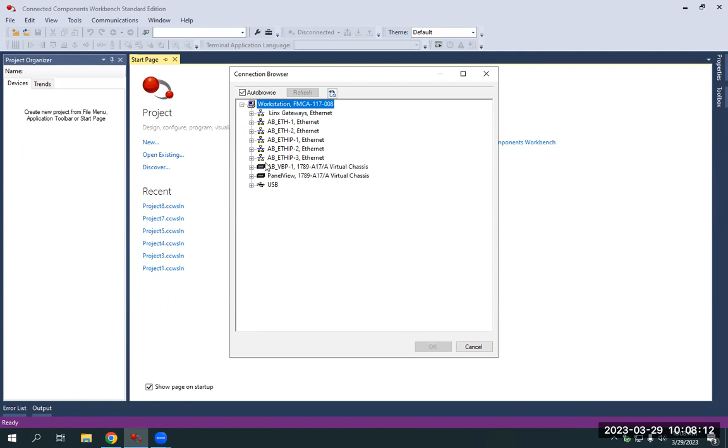This is what the starting page will look like for the Connected Components Workbench. If I hit the Discover button here, it's going to bring up this menu for RSLinx, the connection browser.

And I'm going to find my Micro 820. Looks like we got it right here. So this is our Micro 820, at 169.254.63.18. Just going to hit this OK button to start connecting to it.

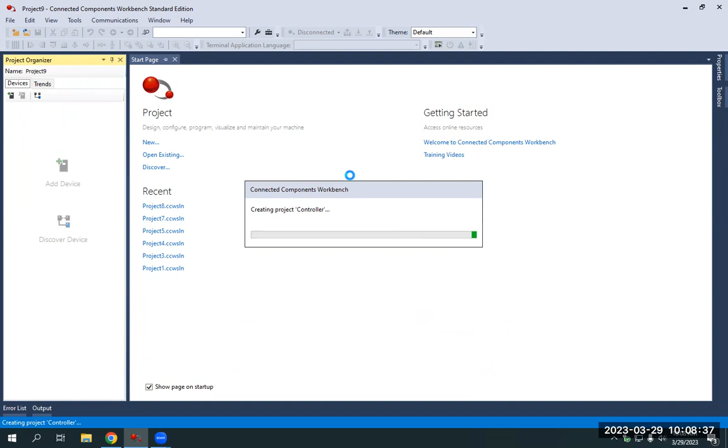And we are almost there. Forgive me for the computer being a little bit slow, but that's kind of just the way it is.

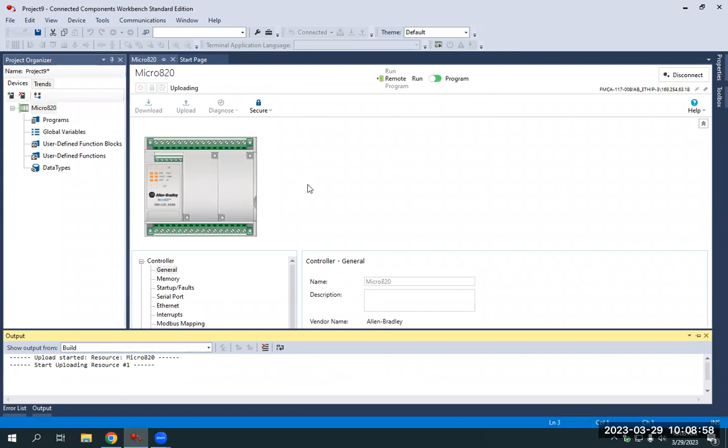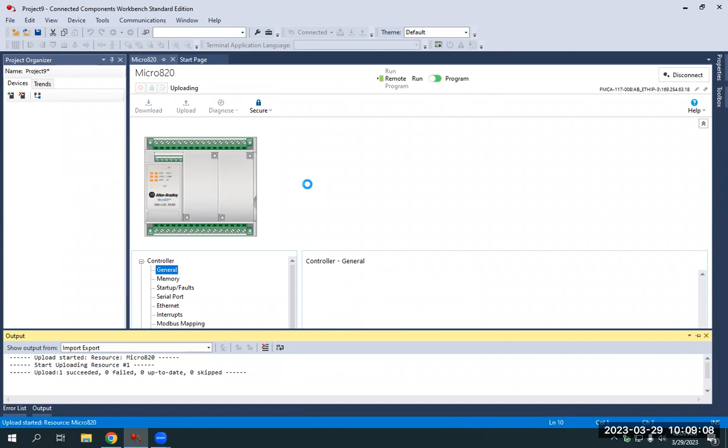So here we are. It's going to pull up the processor and it's uploading from the PLC itself. There is an existing program on here because students have been tinkering with it as well, but we'll go ahead and delete some of those and just stick with one program to go over some basics.

So this is just a general breakdown of the controller. This is what the Micro 820 looks like. These are your parameters, what version number you have, and all that good stuff. And we're in remote run mode. As I've said before, with the Micro 800 series PLCs, you need to be offline to make your changes. So as you can see, we're connected.

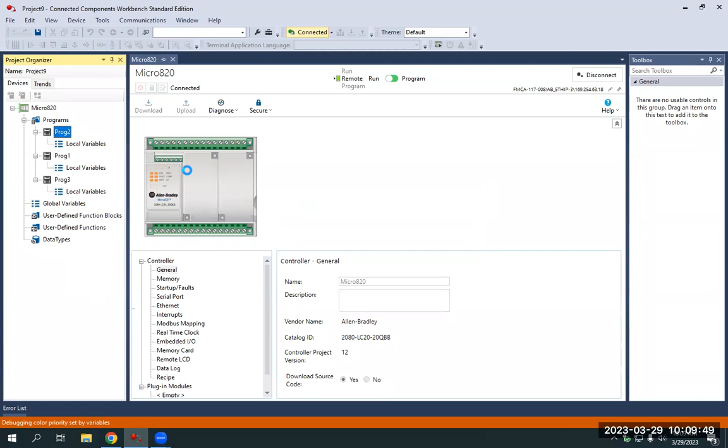If I double click on the programs, you'll see some of the programs the students have just been tinkering with, and it has to go through and open each individual file. So here's some of the ones they've been building using compare functions, counters, and just your standard inputs and outputs.

So what we're going to do here is let's go into program one and see what this looks like. It's got a timer, a couple of timers, a couple of counters. So what we're going to do is we're just going to stick with program one at this point.

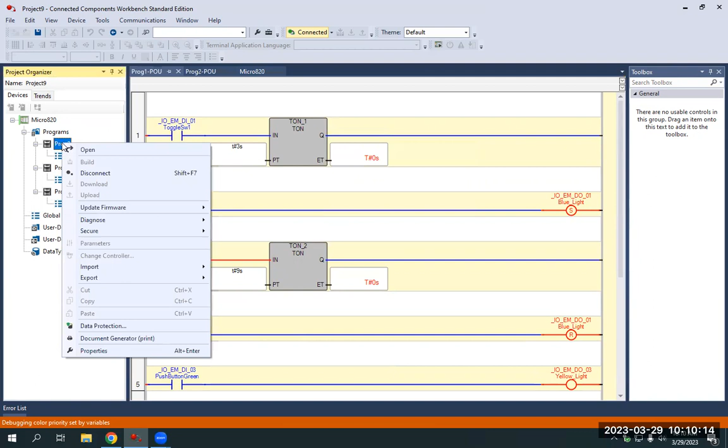So I'm going to go ahead and disconnect. I'm going to get rid of program two and program three. And again, you always have to disconnect. By right-clicking on the program number, you can just delete it.

So now we are in program one, and I'm going to give you a general breakdown of what this is doing. So we have toggle switch one here, and then we're going to a timer. That timer is 3 seconds. It's going to turn on our blue light, and then our blue light's going to start another timer that is 9 seconds. I don't know why they would make a 9-second timer, but...

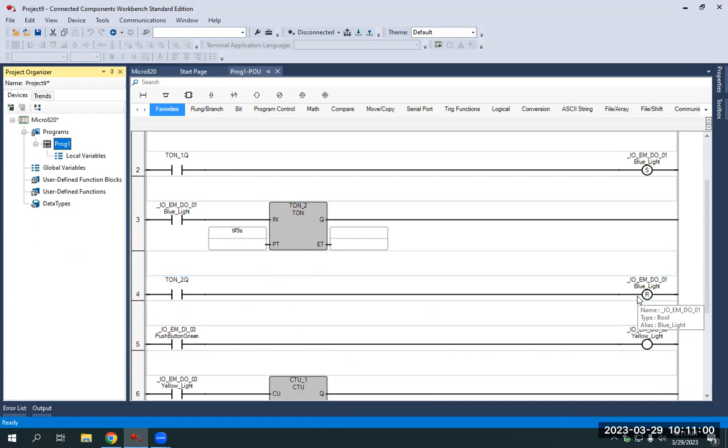Then that timer done is going to turn off our blue light again. I don't know, I didn't make this program. Some students were just tinkering with it. So I'm kind of curious to see what this program does.

So I'm going to go ahead and connect again.

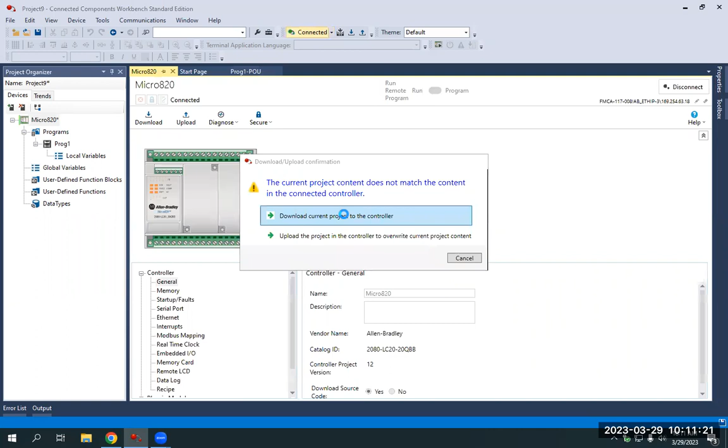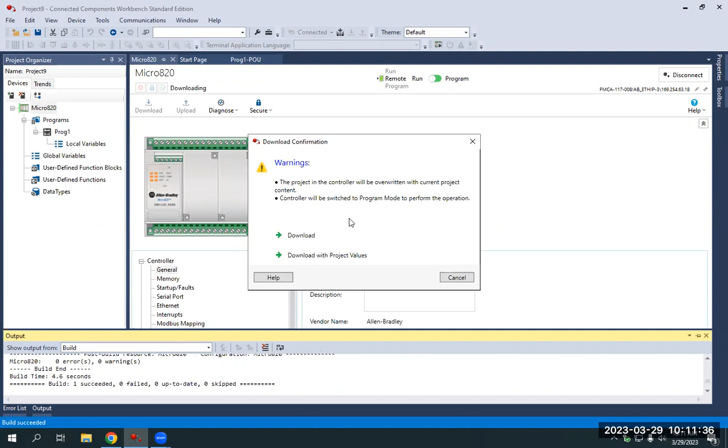Now I'm going to download the current project to the controller. Remember, in PLCs, if you want to download changes or save changes you've made offline, you have to download them to the controller. If you upload, you'll pull the existing program and overwrite your changes. So I'm going to download with project values.

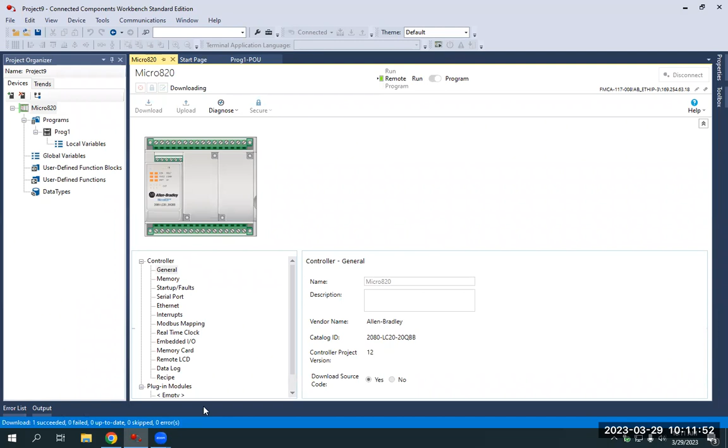Sorry, I'm sipping on my coffee. All right, so we're getting there. We've successfully downloaded one program. We get the little notification down here that it's downloaded, and it's going to be connected here soon.

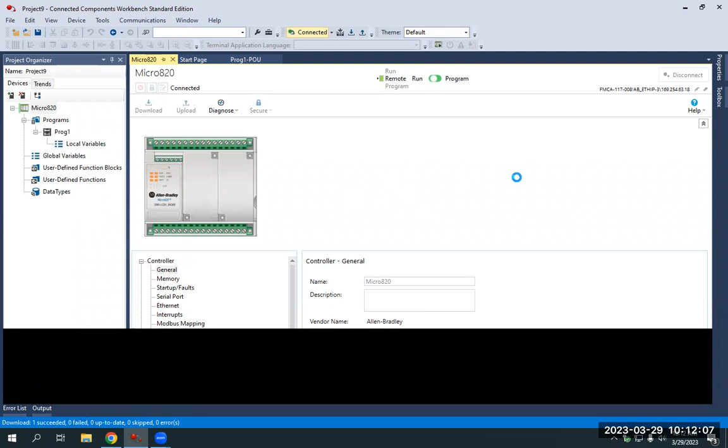Do you want to change to remote? Yes, I do. I want the program to be online so I can see what it does. Again, this is more of a spitball video, not really a tutorial. I'm just going to show you how to tweak things and do a few things, so think of it as part tutorial on timers or counters, maybe a little of both. That being said, we're online with the program. Let's see what it does.

Toggle switch 1, I'm going to flip that on my trainer. That starts the timer, and then my blue light came on. After 9 seconds, my blue light went off. So apparently this is a latch and unlatch sequence here. Got it, so that was a real basic one.

In CCW, your S's will be like your latches and your R's will be like your unlatches in Studio 5000. But this is Connected Components Workbench version 12, so we use S's and R's. Basically, my toggle switch started a timer, the timer turned on the blue light, and that blue light energized this timer for 9 seconds.

After 9 seconds, it unlatched my blue light. Let's do that one more time. Now I've reset my timer values because I turned my toggle switch off. I'm going to turn it back on in 3, 2, 1, and we'll go through the same sequence. My blue light is now on, and after this timer reaches the 9-second preset value, it will energize and unlatch it. Now it is off. Neither one is red or energized, as we call it. So they built a basic sequence that causes the blue light to turn on after a certain amount of time, then turn off after a certain amount of time.

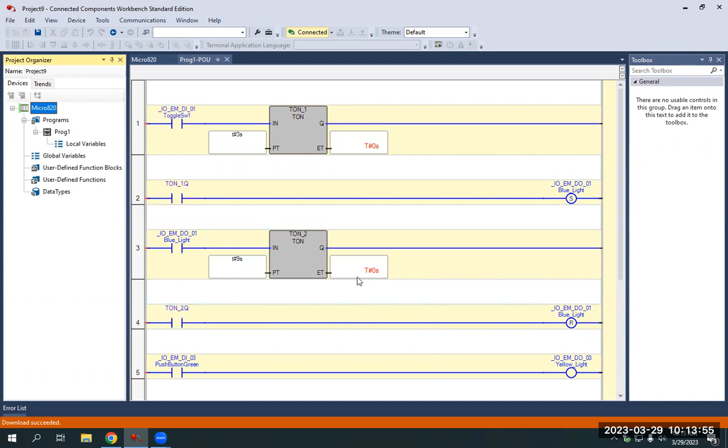Now I'll turn that off, so my toggle switch is off. Now I want to see what they did down here. They used the green push button on the trainer, input 3, digital input 3, to turn on the yellow light. So what I'm gathering is if I push this green push button, every time I turn this yellow light on, it counts up. Our preset value is 3, so once it reaches 3 on that counter value, our red light should turn on.

So I'm going to hit the green button. I did it once, and as you can see, our counter value went up. I did it twice, and it went up again to 2. Then I pushed it 3 times, and now my red light comes on to indicate that output 3 has been turned on 3 times, because our counter value now meets the preset value.

As you can see, you're using Q's instead of .DN's, and you still have the same CU for your count up, that's where your input's coming in. Your resets, however, for your counters work slightly different in Connected Components Workbench. So we're using digital input 3, our green button, to turn on our yellow light, and digital input 1, our first toggle switch, to start this timer. But we're also using digital input 2, our second toggle switch, which aliases as toggle switch 2, that popped up there momentarily.

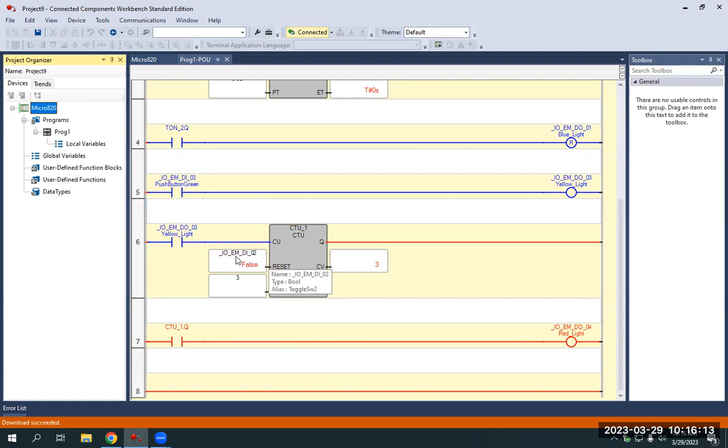and it reset the counter value, thus turning off the red light, because now our counted value is 0 instead of 3, which we can't be queued unless we have met that preset value. So that's just going over a very basic CCW program, like I said, that was built. Kind of want to go over a couple other things you'll see over here in your project organizer.

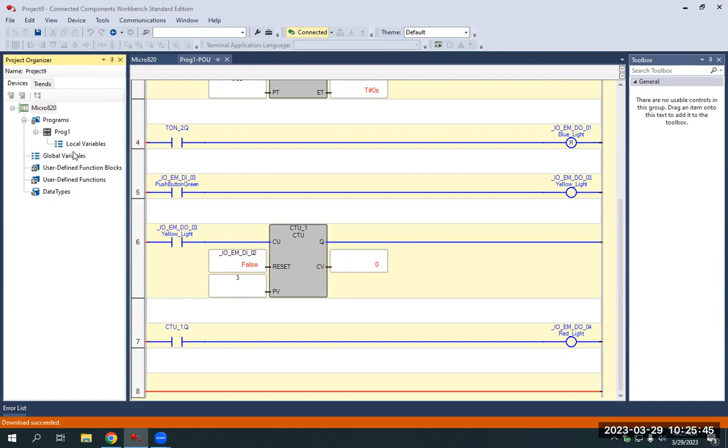You have your local variables, which are designed specifically for each individual program. And then you have your global variables, which will be the ones that are tied to the PLC specifically, whether they've been created or they're just part of the inputs and outputs. So you'll have your output 0, output 1, output 2, output 3, output 4, and it has the alias along with them. So obviously output 1 is your blue light, green light, yellow light, and red light. And those are something that we have to purposely give them ourselves.

Then we have digital input 1, 2, 3, and 4 as toggle switch 1 and 2, and your green push button and red push button. That's the way that these were designed in the PLC specifically. One of the reasons why we just meant to keep the switch 1, switch 2 lined up with input 1, input 2, you'll notice input 0 isn't being used, and that is for a very specific purpose.

Input 0 is, I think, used as an analog input as a standby for us later on. But again, the way this trainer was designed by the PLC cable crew, that is exactly what it's for. So if we scroll down here, you're just going to see a couple little variables here, keeping track of timers, the amount of time it's on.

You'll notice the statuses are changing over here in logical value. And then we've created some math inputs and some counters. Notice counter 1, 2, 3. If you expand it, you actually have kind of the same values as you'd see in Studio 5000 with your count up, the reset, the preset value, the Q, which is like the .DN, the counted value. I mean, there's not really a whole lot more to kind of go over.

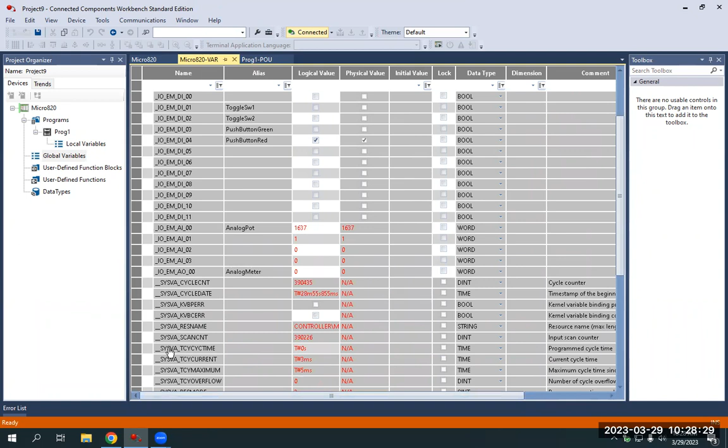But you have some comments over here as well. I always like to make comments: when in doubt, comment out. The reason for that is so you can kind of keep track of what these are designed for. And it specifically tells you in the comments here, programmed cycle time. Right here, you have your system variable cycle time. So just know, make sure you leave comments.

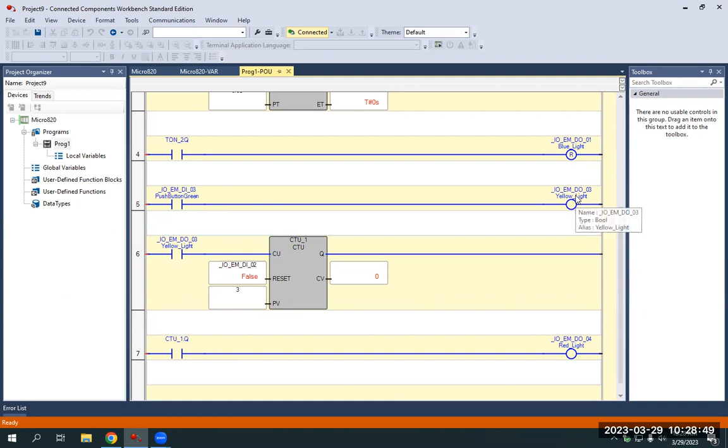Make sure if you have a physical input that is wired in, make sure you assign an alias to it. So when you're typing it in the program, it will actually let you know what it is. Obviously here, push button green, it's a dead giveaway. Yellow light, dead giveaway. So again, I just wanted to go over some basic structural differences between the CCW software and Studio 5000. Once we start building our own trainers, you'll be very thankful you have this kind of video as a resource.

And again, make sure you look up plenty of other resources available on YouTube. There are plenty of project examples, as well as connect to the skill trainer that we have over here behind me and watch the program run live so you can get an idea of how the CCW software can be built to actually run a piece of equipment.